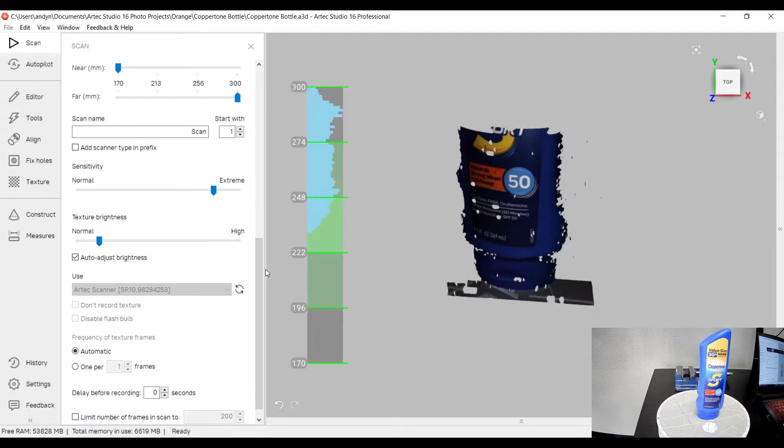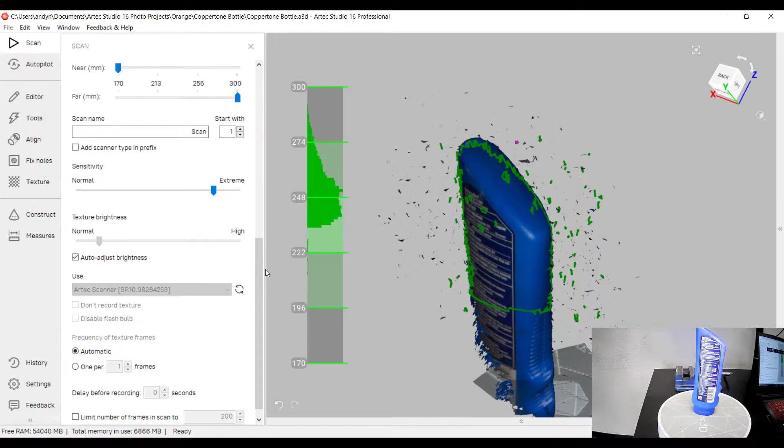So first what we're going to do is we are going to scan our sunscreen bottle here. And we have it set up on the Artec turntable. Great accessory to help automate your scanning processes. And just like any other scan, we're just going to go around, capture all these areas. Make sure we get some of that great wording on the back of this bottle here.

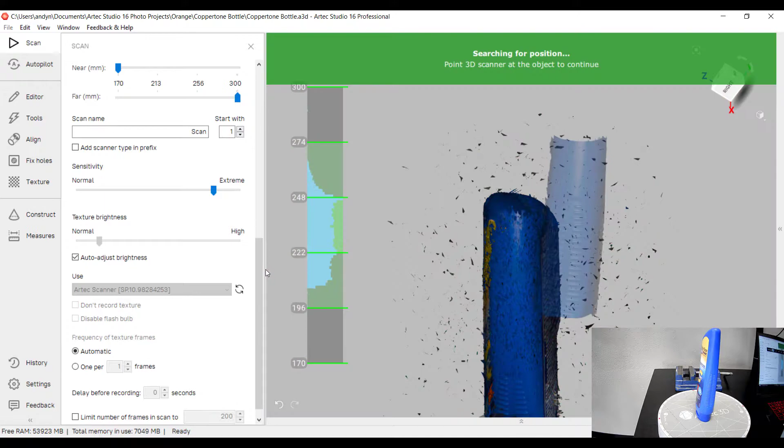Great thing about the Artec turntable, if you happen to lose tracking, picks it right back up and starts scanning again.

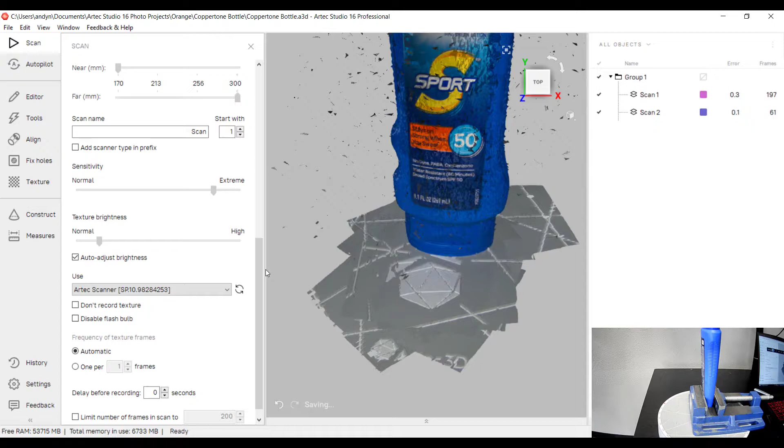Okay, we've scanned the first side. Now, because this bottle does have an odd shape, we're going to use this drill press to help hold the bottle. And we're just going to get those areas that maybe we didn't get previously. Check out our preview and start scanning. And just get those areas that we may have missed.

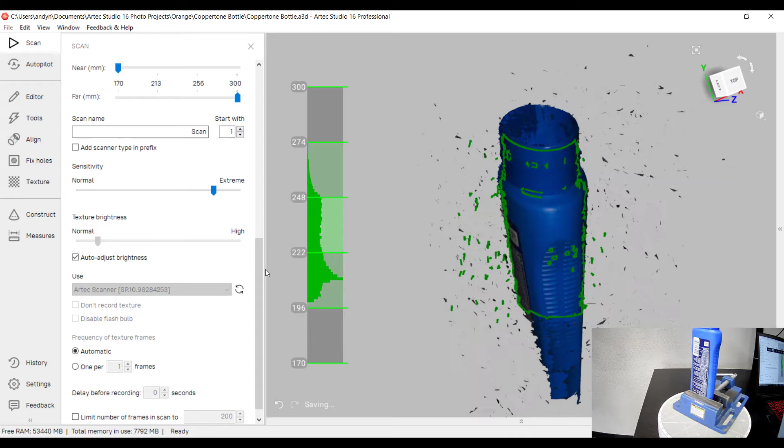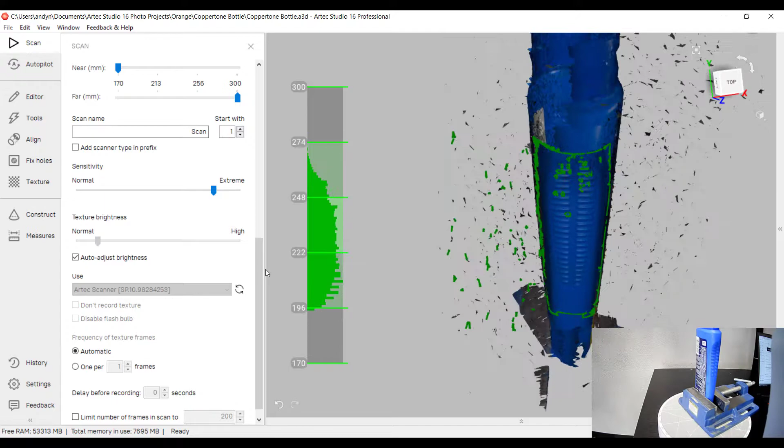Once again, the Artec turntable doing its thing in picking right back up where it may have lost tracking. Okay, and we are good. Now let's do some processing. You'll notice on the bottom here, it says saving. Artec Studio also features an autosave mode, so you don't have to go back and save after every few algorithms. Really helps to speed up the process and also saves on RAM.

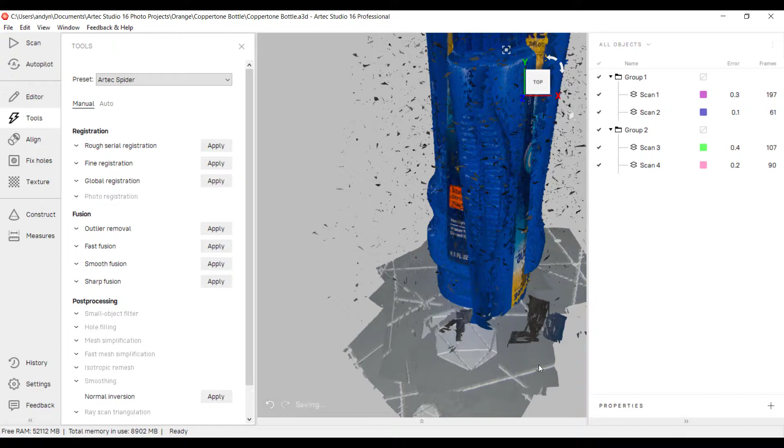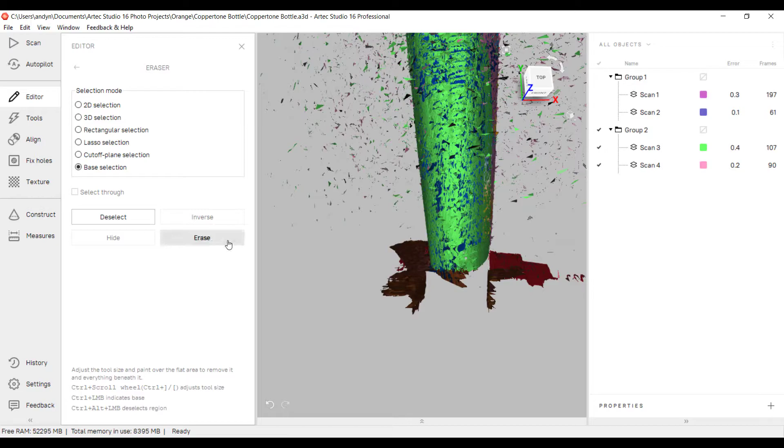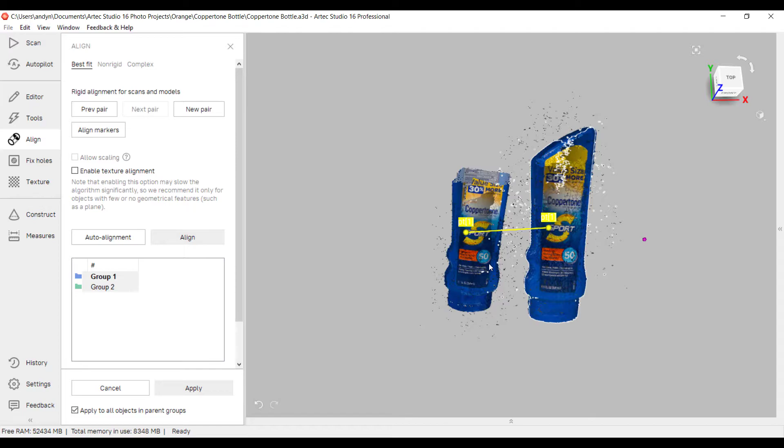Let's remove the turntable from the data as we don't need that. Quick little base removal. Now let's align the data to each other. And what's great is because there's so much color information on here, you don't have to be absolutely perfect because we're going to use all of that color information for alignment purposes.

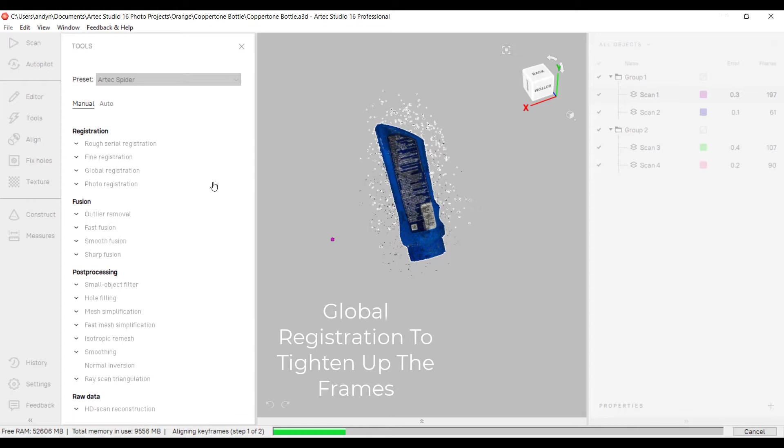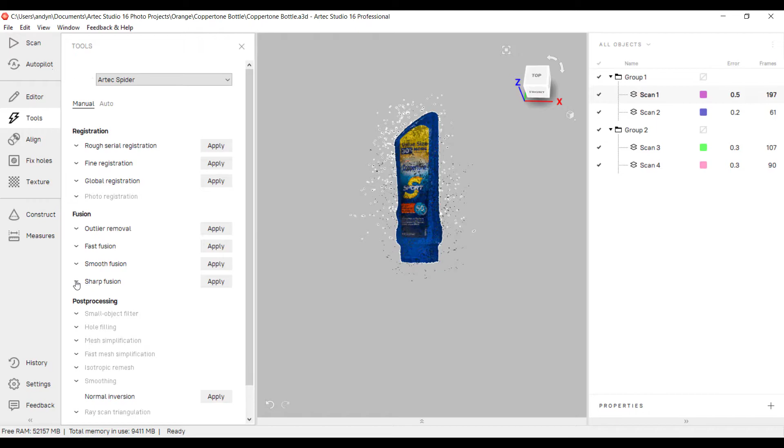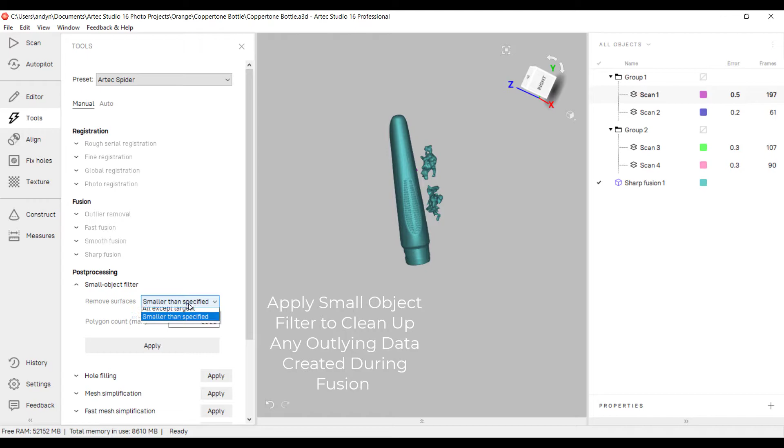Okay, now that global registration is done, we are going to create our watertight mesh. And then we're going to move on to the newest step, which is importing our photos. Okay, let's take a look at our data here. Very nice, clean. You've got your little finger tab here. Those grips came out great. Everything looks really nice and clean.

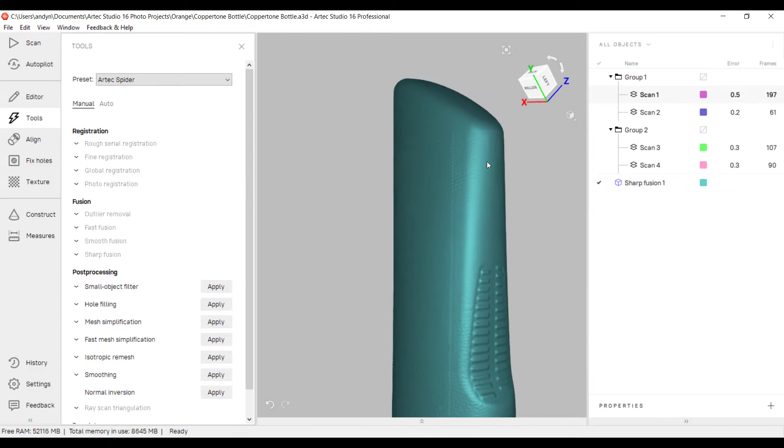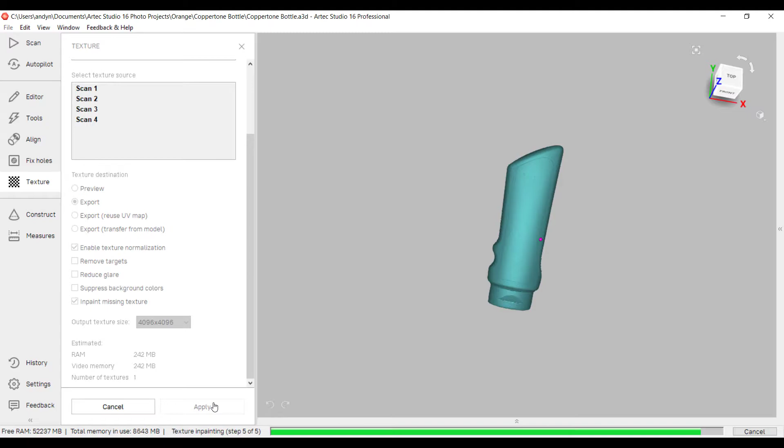So now we're going to do a few things here. First thing we're going to do is we are actually going to add the texture like we normally would in previous versions of Artec Studio. We just take those scans that have our texture information, and just like you would any other time, we are going to apply texture. Texturing is all done. Looks great, just like Artec scanners always do. Always bring out some nice color.

So now what we want to do is we are going to add the photos. You're going to go into your File tab, we go to Import, and now you see Import Photos. And that's going to open up the file where you have it. You are going to select all. In this one, I have about 50 photos. When you are taking your photos, you want to take them from multiple angles, make sure that lighting is all the same, turn off your autofocus, just so everything is consistent throughout.

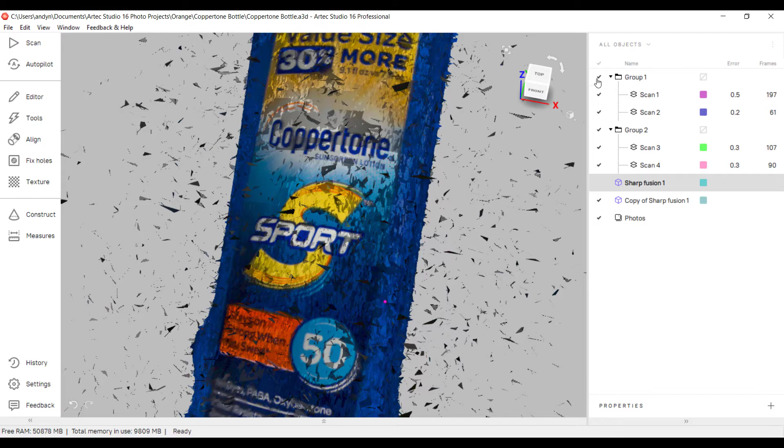So we've highlighted all our photos. We're going to click Open. We will import those photos in. And now we need to register those photos to the texture information that's in our raw scan data. So we're going to highlight our photos, we're going to highlight our mesh and our raw data. We go into our tools, and now you will see photo registration. We'll click Apply, and they will register.

Okay, our photos are registered. If you want to check your progress, you can look down here. Now it's okay if a few of them fail. That's why we take multiple pictures. Taking multiple pictures will ensure that you have a good overlap. So we're going to click off of our original source data that comes from the raw scans. Now we're going to use our photos on top of our fusion, go into texture, make sure you now have as your texture source photos highlighted, and still the mesh that you are going to be using.

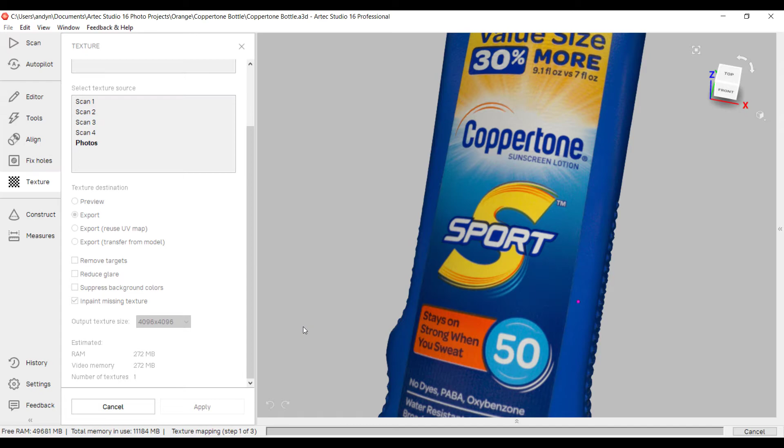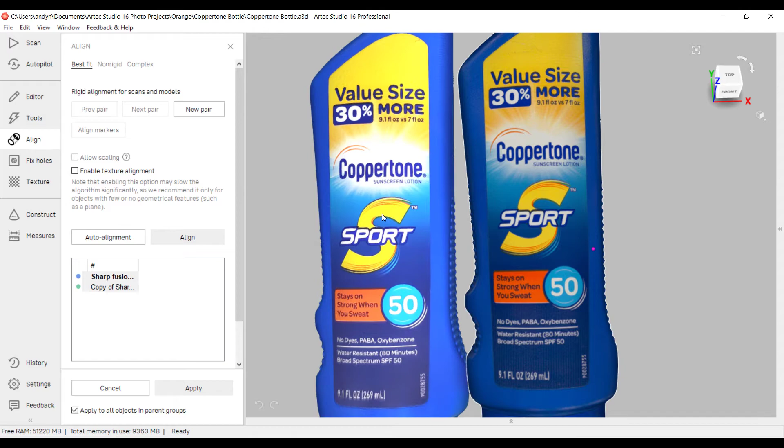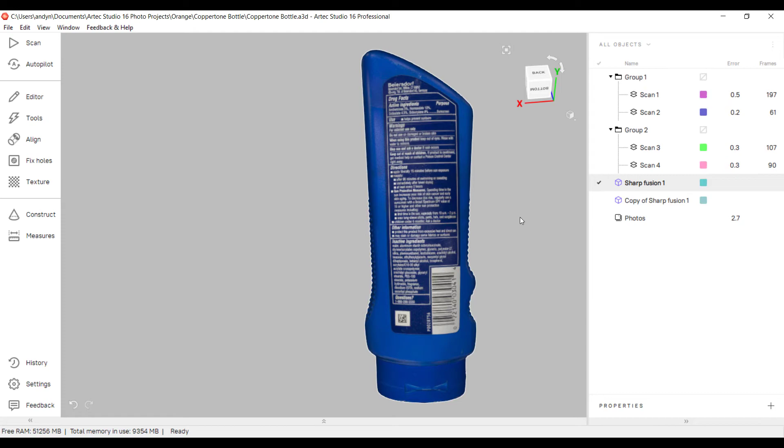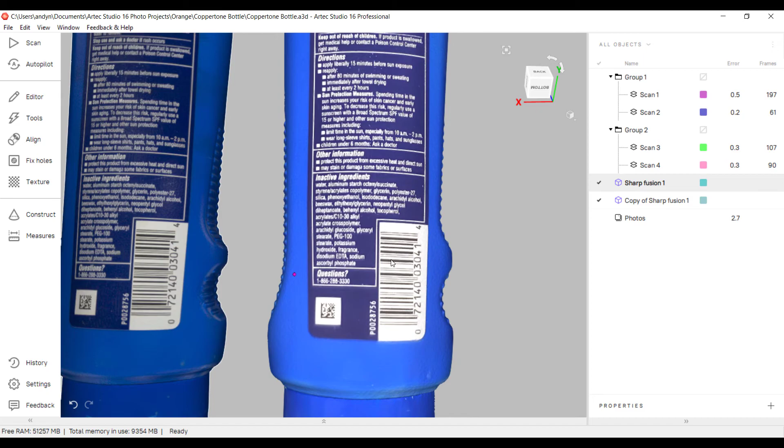Okay, here we are. Now, let's take a look at the two scans next to each other. So this one is the data that comes from the Artec data. As you can see, everything looks good. You can read the wording. A little bit blurry there. Now let's take a look at the one with the photos. Colors are brighter. The wording is very crisp. You can see all that nice texture on the side of the bottle. Everything just looks clean and crisp.

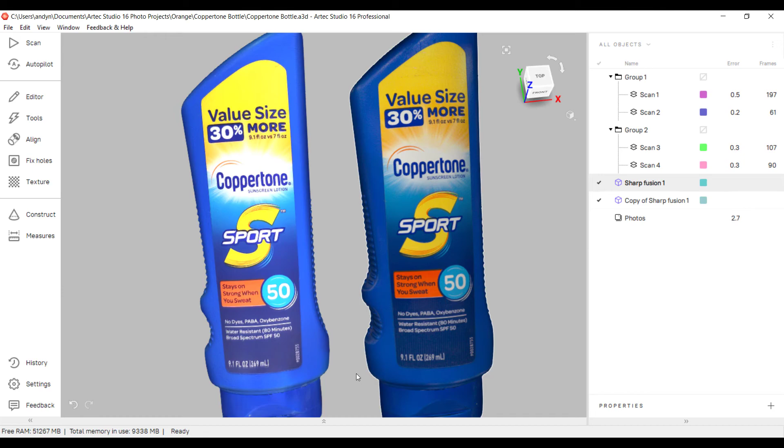One thing I want to note is these photos were taken by my Samsung Galaxy S10, so definitely an older phone with lower resolution, but if you use a DSLR camera or a newer cell phone, you are going to get even more incredible data. So there it is. That is the new photogrammetry function in Artec Studio 16.